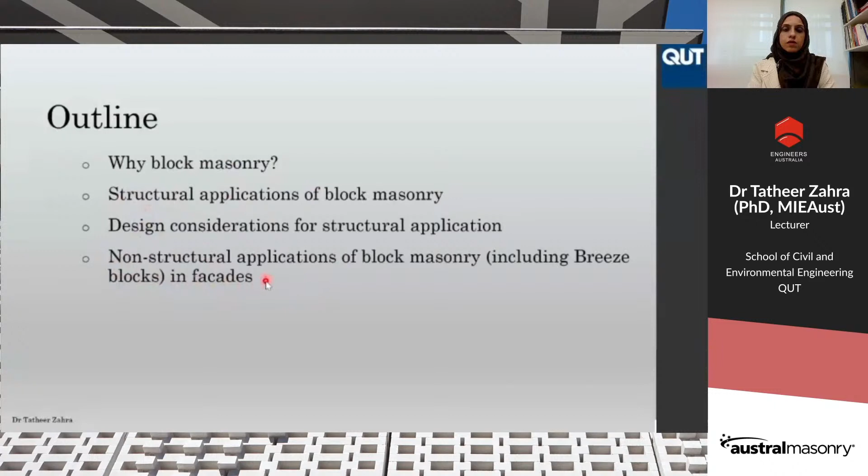So I will talk about the structural applications of block masonry, and further we will discuss the design considerations for structural applications of block masonry. In the third stage, I will take up the non-structural applications of block masonry, which will include the discussion on the usage of breeze blocks in facades specifically.

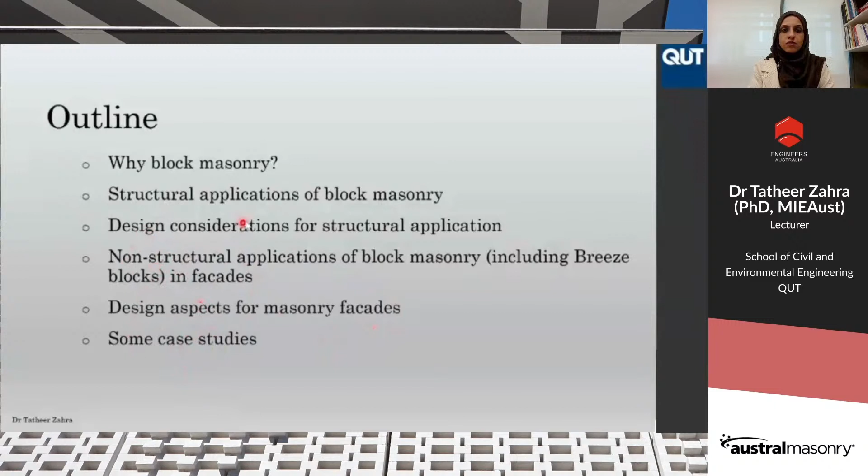So I would like to discuss with you the design aspects for masonry facades and what are the challenges to overcome using these blocks in the masonry facades or the facades of the buildings. Finally, I will conclude my presentation by showing you some real-world examples of buildings which have employed block masonry as structural and non-structural components. So let's start with why block masonry.

Block masonry is comparatively new as compared to brick masonry, which is ancient, and brick masonry has been used for centuries in buildings. So you might have seen many heritage buildings in Australia and around the world which are made of unreinforced brick masonry. Block masonry, in comparison, is quite new. It has been developed with quality control manufacturing of blocks a few decades ago.

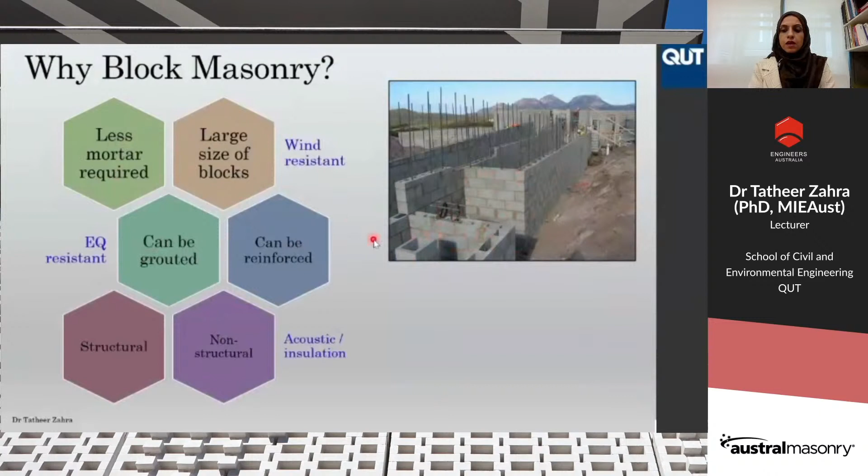And as you can see in this figure, block masonry mainly consists of concrete blocks which are made hollow purposely. And the benefit it can offer is that less mortar is utilized as compared to brick masonry and other forms of masonry. It also offers the use of large size blocks, as you can see in this image. The common block sizes available in the market in Australia are 390 millimeter long, 190 millimeter thick, and the height of these blocks is usually 190 millimeter.

So these, in comparison to bricks, are much bigger blocks. Brick is usually only 230 millimeter long, 76 millimeter high, and 110 millimeter thick. So because of the large size of blocks, you will need fewer blocks to create the same size of wall which one can make in brick masonry.

Secondly, as you can see, these blocks are usually hollow and they have hollow cores in the middle of them. These hollow cores are arranged in different patterns in different kinds of blocks. And the purpose of these hollow cores, firstly, is to reduce the self weight of the blocks, and secondly is to provide reinforcement and grouting. So this aspect enables this kind of concrete block masonry to be earthquake resistant as well as wind resistant.

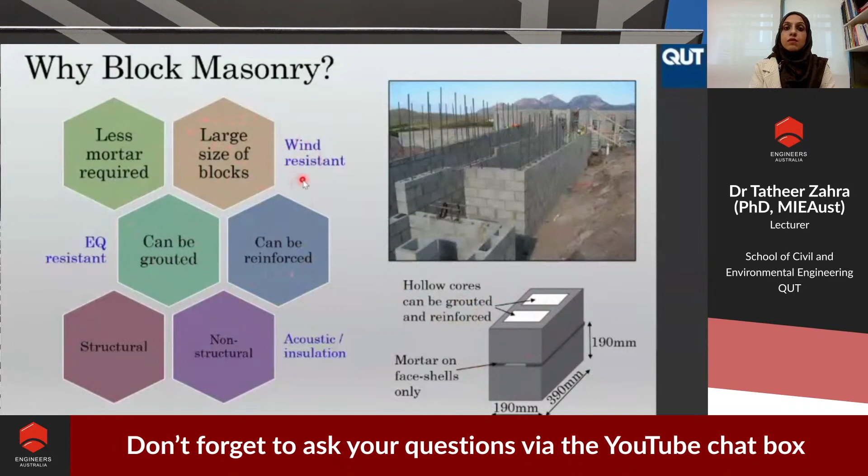So these cores can be reinforced as shown in this image, and the cores can be grouted. Sometimes, if reinforcement is not needed, the grouting can be done alone. And from my recent research, I discovered that grout plays a major role in controlling the strength of the block masonry. I discovered a 50 to 60% increase in the block masonry strength with grout.

Due to these significant properties, block masonry can be used as a structural component in building as well as a non-structural component. And both of these components provide excellent acoustic resistance as well as insulation from heat and sound. So this is a brief introduction of block masonry and what benefits it can offer in comparison to other building materials.

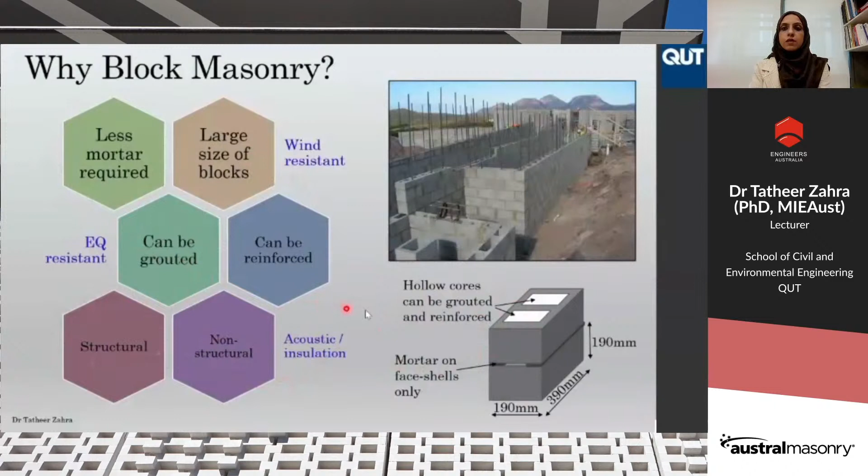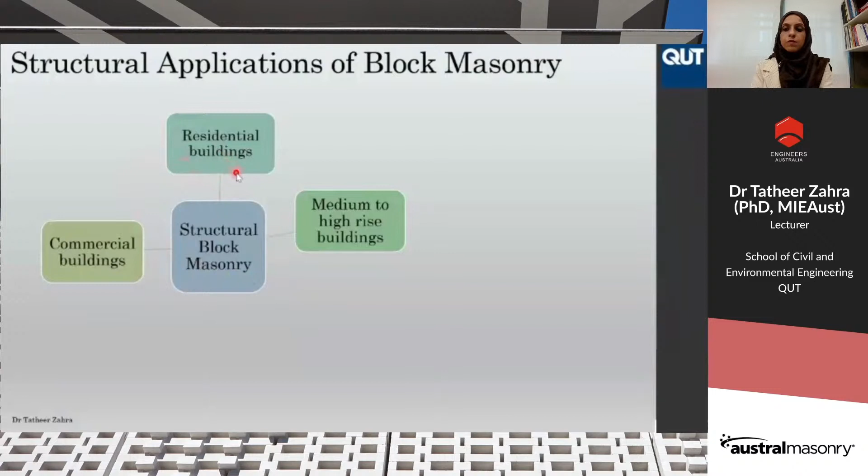Now, the structural applications of block masonry, how it can be used. Like other materials, including concrete, steel, and timber, block masonry can be employed in any kind of building. So it can be used for residential buildings, in housing and apartment buildings, commercial buildings, such as shown here, or medium to high-rise buildings. I'm going to show these real-life building examples later in my presentation.

So the idea of employing block masonry as a structural element is that it is supposed to carry two different loads. First, gravity loads, which are caused by structural elements themselves and other imposed loads. And secondly, lateral loads, which are caused by earthquake, wind pressure, and in some cases by retaining earth. So as a structural element, masonry is used as load-bearing walls, and these walls should be able to withstand the most critical combination of these loads as described by the relevant standards.

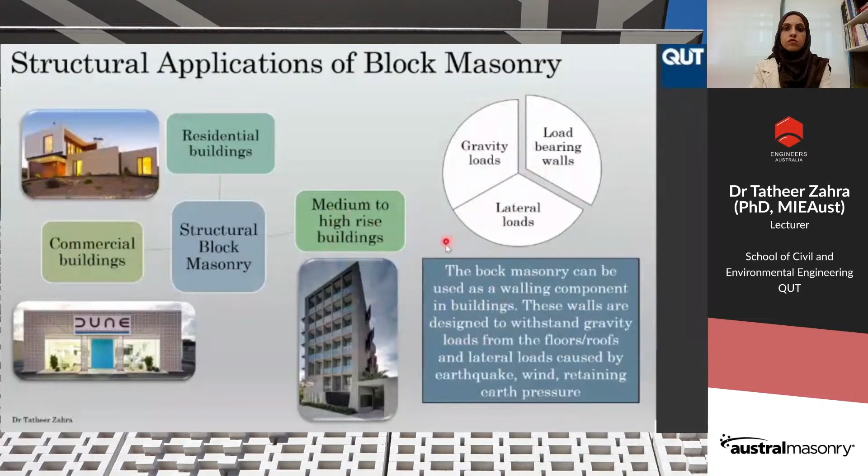So now I'm going to talk about the design aspects so the masonry can withstand these loads. What are the design considerations? Briefly, I will describe the design steps or the design philosophy of masonry buildings. Like any other building, the first step would be to assign gravity loads. This step usually uses the regional codes for any building. So this is at the building level, and the gravity loads are assigned according to the local codes and the usage of the building.

In the second step, usually the fire and durability considerations are taken into account, and then the preliminary sizing is carried out.

So preliminary sizing means basically the thicknesses of the masonry walls are decided based on the fire and durability requirements. I'm going to discuss the fire and durability design later in my presentation. Once the designer gets the preliminary sizes and the assigned gravity loads, a detailed gravity and lateral load analysis is carried out. It can be done through software, and for low-rise buildings it can be done by longhand calculations as well.

Gravity loads are distributed on each wall based on their tributary areas of the floors or the slabs. Similarly, the lateral load analysis is carried out to compute the earthquake loading and wind loading on the masonry building, and finally these loads are combined to find the most critical load combination, and the most critical load is then distributed. So these three steps are carried out at the building level, and then these critical loads are distributed on individual walls. So this is local or detailed analysis of the walls themselves.

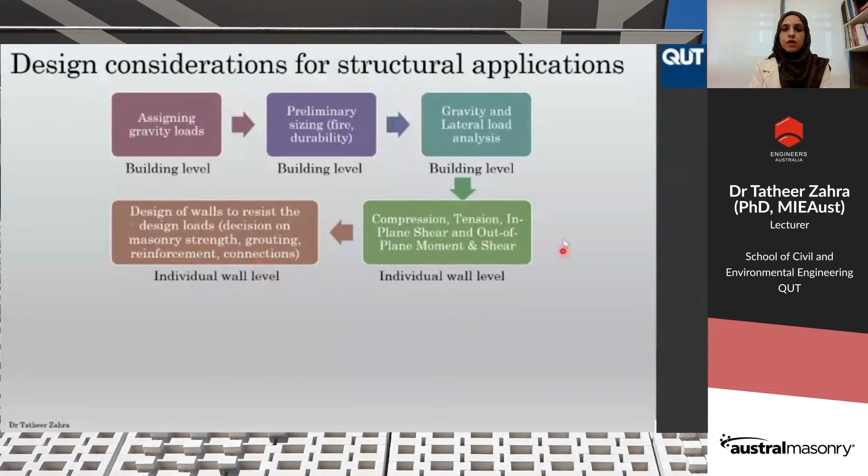I will discuss the mortar grades later, what kind of mortar grades are allowed to be used with block masonry. At this stage, the grout strength is decided if the masonry has to be grouted to increase the strength. Reinforcement diameters and spacings are calculated, and the connections between the non-structural and structural parts of the building are also designed. So this is basically how masonry buildings are to be designed.

Now the Australian standard to be used for designing the walls to withstand these loads and other durability and fire concerns is the Australian Standard for Masonry Structures, AS 3700, and the recent version was released in 2018. This code provides provisions for the design of structural masonry, which can be unreinforced masonry of blocks or bricks, and reinforced masonry, commonly known as URM for unreinforced and RM for reinforced.

The code provides design provisions for durability to resist environmental effects on masonry buildings, fire design for resistance against fire spread and insulation, and serviceability aspects to resist cracking, deflection, and movements in any masonry building. The strength aspects provide resistance against the design loads, whether compression, in-plane shear, or out-of-plane loads. And finally, the stability aspects of any building to resist overturning, uplift, and sliding. So this is a brief of this code, and now I'm going to discuss individually the design guidelines for fire, durability, serviceability, and strength.

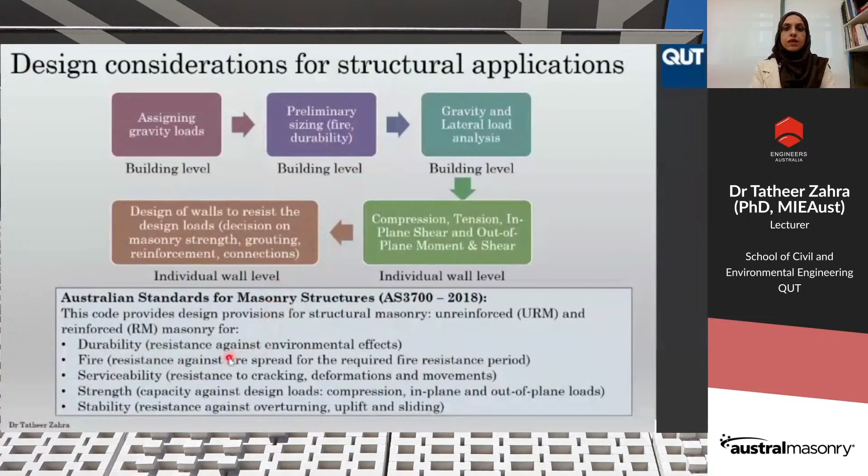Starting with fire design, masonry walls or masonry buildings can be designed using section 6 of AS 3700. This section provides the structural requirements for masonry walls based on the desired fire resistance level. As you might know, the fire resistance level is determined from the National Construction Code, the recent version being 2019, based on the construction type and the building type. Once we know the fire resistance level or fire resistance period, this code provides the provisions for structural adequacy.

For a masonry wall to be structurally adequate during a fire event, it is usually controlled by the slenderness ratio. As one can imagine, in the event of fire, the masonry surfaces can deteriorate and change the thickness of the walls. If the wall thickness changes, the slenderness can increase, because slenderness is nothing but the ratio of height to thickness of the wall. Because of spalling of face shells or any other fire damage, the slenderness is restricted: for reinforced masonry walls it is restricted to 36, while for unreinforced masonry walls it can vary from 15 to 25 depending on FRL.

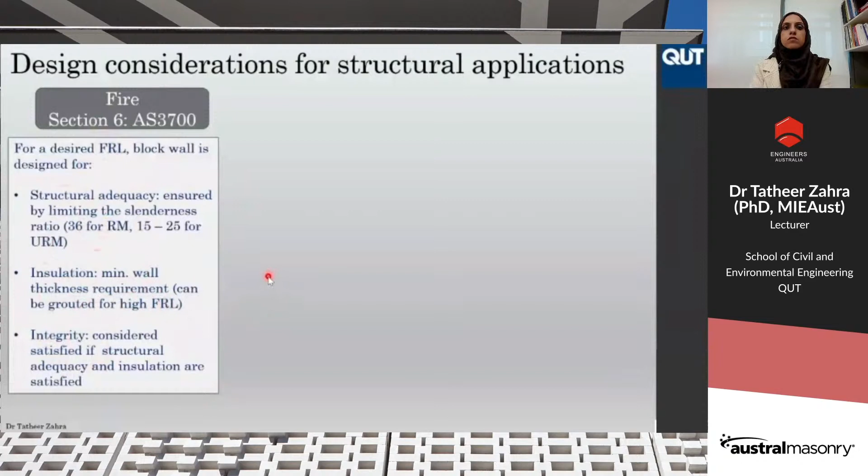So this was about the fire design of the block masonry walls. Now the serviceability. Serviceability can be designed using section 2.5 of AS 3700, and serviceable block masonry will be considered safe against cracking, deflection, and movements. So maximum allowable crack width is given in the code as 1 millimeter, but sometimes it can be 0 because of the aesthetical requirements of any building.

Deflection limits are usually provided for the masonry beams only because they can deflect. Otherwise, for walls, there are no deflection limits prescribed in the code. However, this code provides the deflection limits for the adjoining members or the supporting members so that they don't deflect excessively to avoid damage to the joining masonry.

The third aspect of serviceability: this code says for a masonry building to be serviceable, robustness design should be carried out. And for carrying out the robustness design, a minimum of 0.5 kPa out of plane pressure is considered on the surface of the wall. And then it is made sure by designing it that this pressure can be resisted by the wall throughout the life cycle of the wall, during construction as well as during the design life.

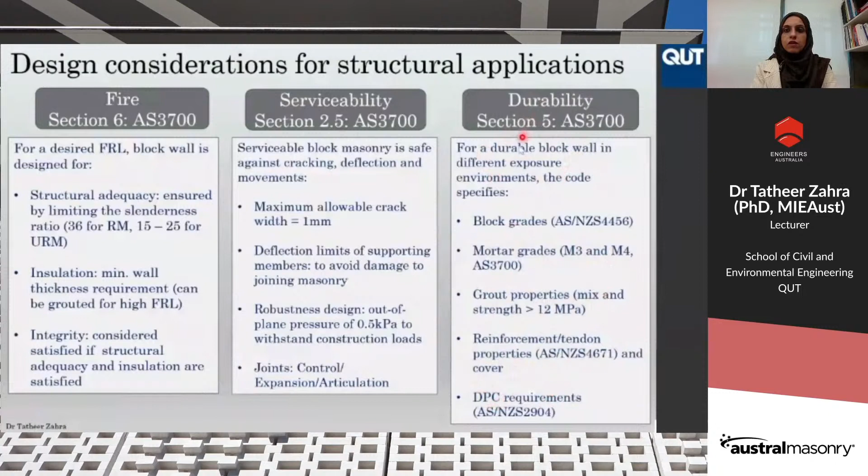Then the reinforcement and tendon properties are also included in the code, and additional details can be taken from AS 4671. Cover to the reinforcement is also specified in AS 3700 to avoid corrosion of the reinforcement. Damp-proof course requirements are also included in section 5, and more detailed requirements for masonry buildings are included in Australian standard 2904. So damp-proof coursing is required for water ingress and water tightness design. It will resist the water accumulation in the masonry walls, and it will resist the deterioration in the surface of the walls, which can be caused by water. So these are the fire, serviceability and durability aspects.

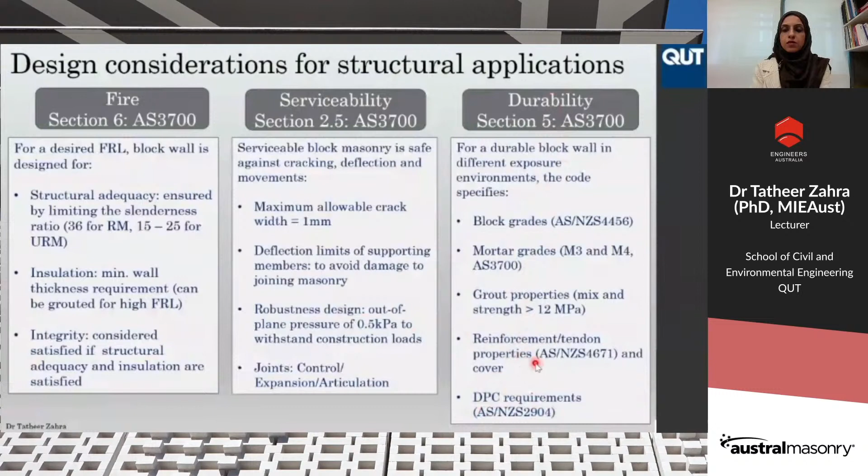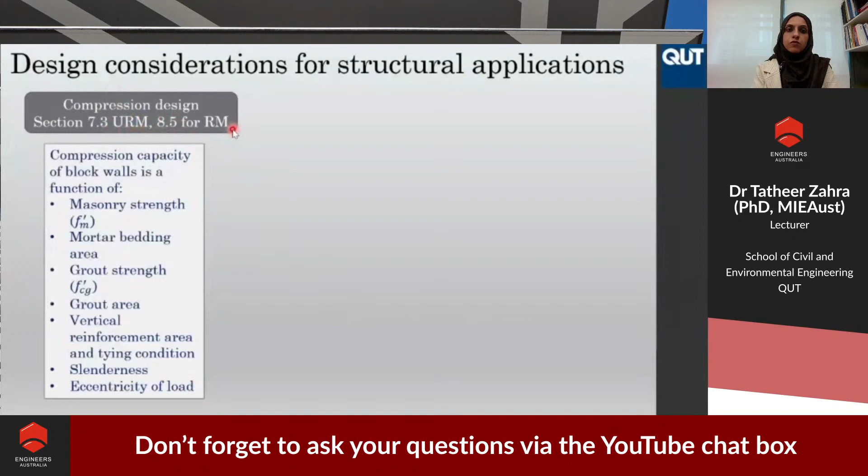Now the strength aspects. For strength design, firstly, I would like to discuss the compression design. Compression design is separate for unreinforced masonry and reinforced masonry. So Section 7 of the code, AS 3700, covers the specifications for unreinforced masonry for compression, shear, and bending. And Section 8 of the code covers the reinforced masonry design. So I cannot discuss the design equations. However, I'm going to discuss the factors on which the masonry compression strength or shear strength will be dependent.

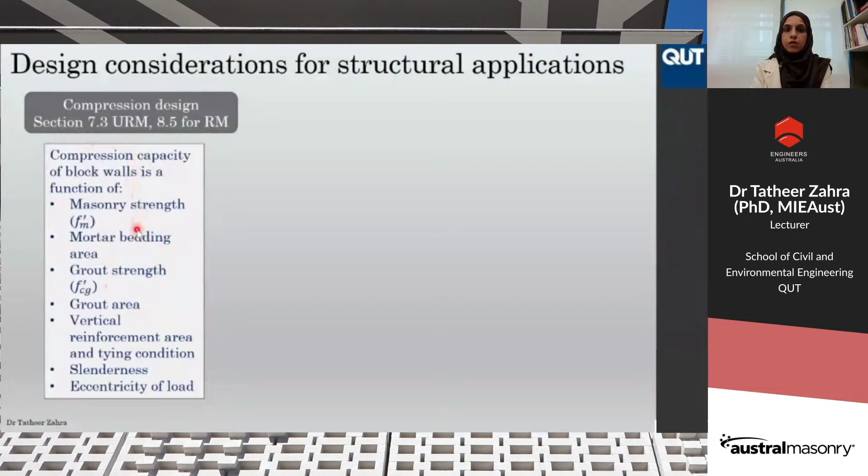Then another important parameter is the vertical bars, vertical reinforcement. If the masonry has to resist earthquake loads, and if the height of the building is more, then vertical bars have to be included to increase the strength of the building. And vertical bars are to be tied in both directions as per the code requirements. There is another requirement that the bars should be centrically placed to provide sufficient bond with the grout.

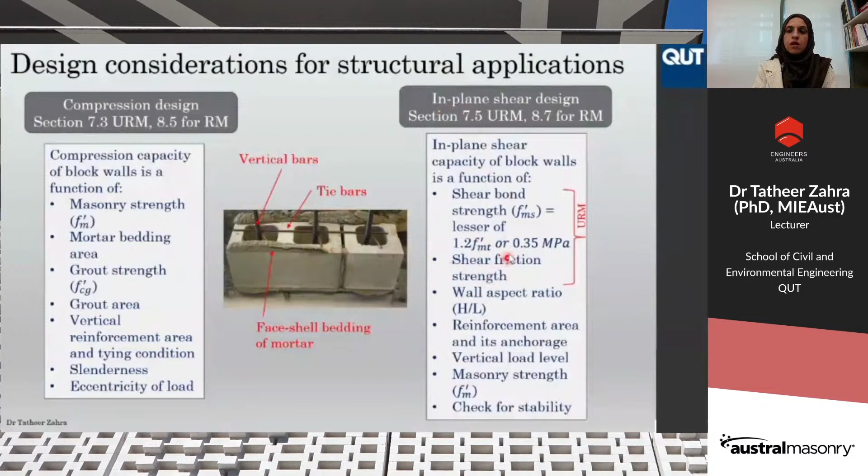Shear friction strength is also important. So the friction between the joints provides resistance against in-plane shear. So because of the low shear strength, you can see that unreinforced masonry can be critical to resist earthquake. However, if we use the vertical reinforcement, then the vertical reinforcement area and its anchorage with the slabs and the footings is important in resisting the in-plane shear. Masonry strength, of course, again plays the major role for in-plane shear.

And this code also checks the stability of the walls against rocking failure. So sometimes the aspect ratio plays a major role in stability failure. So for certain aspect ratios, it is recommended to check stability of the walls against rocking failure. So this was about in-plane shear design of block masonry.

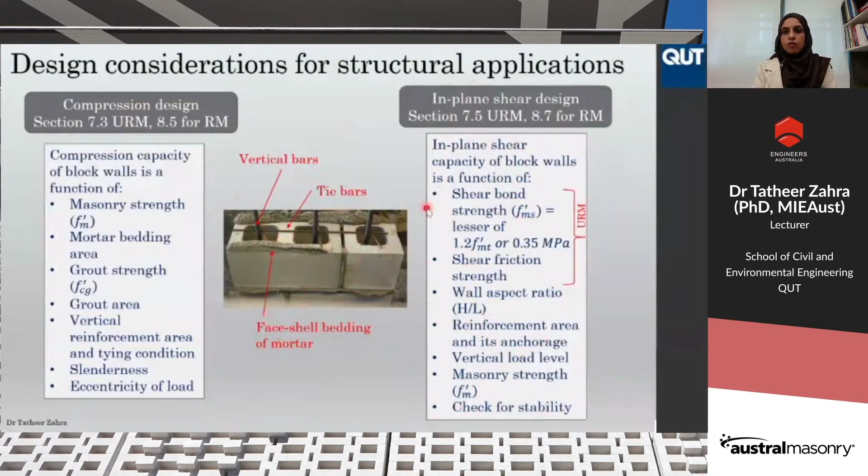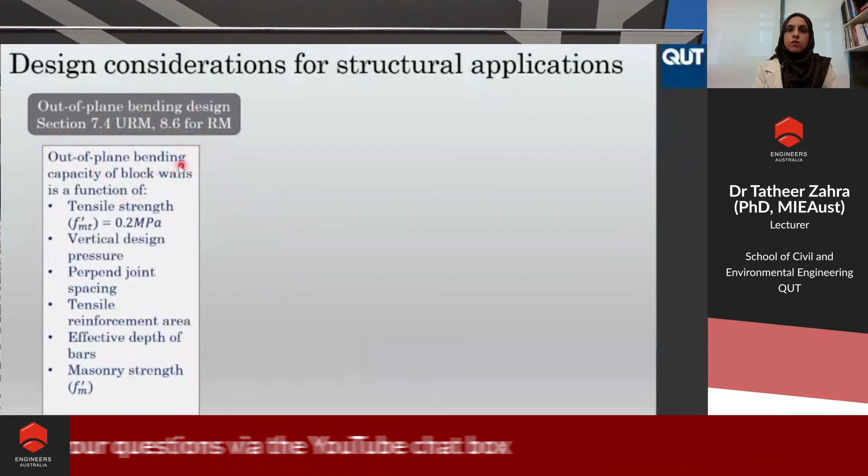Now moving on to out-of-plane bending design. Out-of-plane bending design is covered in section 7.4 for unreinforced masonry and section 8.6 for reinforced masonry. So out-of-plane bending is primarily critical in wind loads in masonry buildings, specifically if the building is in a cyclonic region. So the wind loading will cause critical out-of-plane bending as compared to the earthquake loading.

So for out-of-plane bending, masonry has a very low strength if it is not reinforced, because of the low tensile strength. So according to the standard, the characteristic tensile strength of masonry is only 0.2 megapascal. If it is not tested, then the maximum value is 0.2 megapascal.

So because of this low number, one can imagine if there is no reinforcement in the masonry, then it is vulnerable to earthquakes. In history, we have seen the damage to masonry buildings, specifically brick masonry buildings, because brick masonry is usually solid masonry in which reinforcement is not provided. And in absence of reinforcement, the building will be vulnerable to out-of-plane bending and it can collapse.

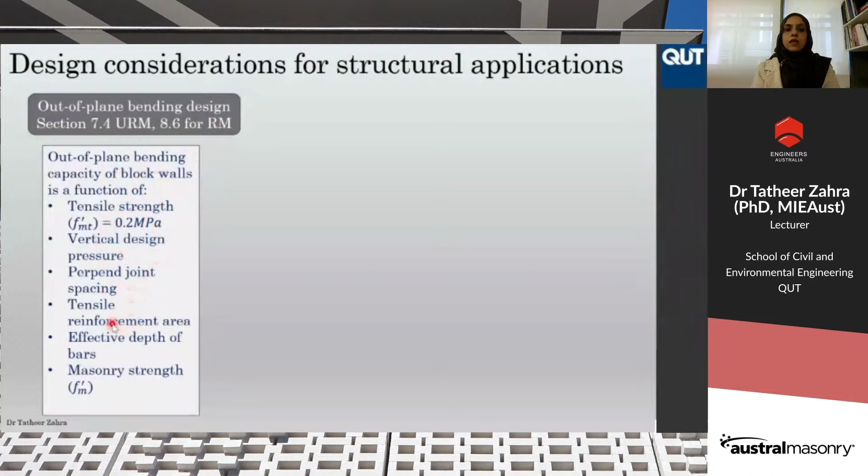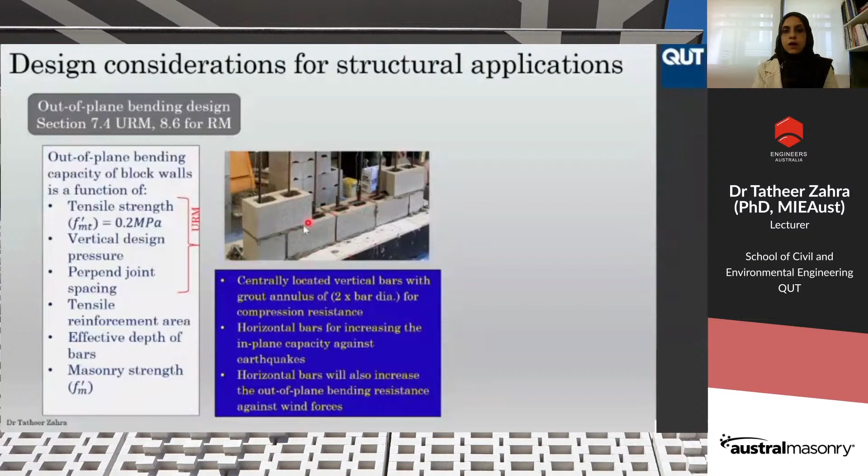So these are some design tips, some considerations which a designer can undertake. The bars should be in the center of the blocks. And the reason behind it is that the vertical bars should have a grout annulus around them, which should not be less than 2 times the diameter of the bar, to provide sufficient compression resistance and the bonding with the bars. Horizontal bars, as shown here, can be provided along with vertical bars. These horizontal bars can take part in taking the in-plane shear as well as out-of-plane bending.

Lastly, the out-of-plane shear design. Unreinforced masonry cannot take out-of-plane shear, so these out-of-plane shear design specifications are provided for reinforced masonry only. Unreinforced masonry will show very brittle failure for out-of-plane shear forces.

For reinforced masonry, the shear strength for out-of-plane shear is considered as 0.35 megapascal. Tension reinforcement is taken into account in the design equation, as well as the horizontal reinforcement. The effective depth and spacing of the bars are the main factors taken into account

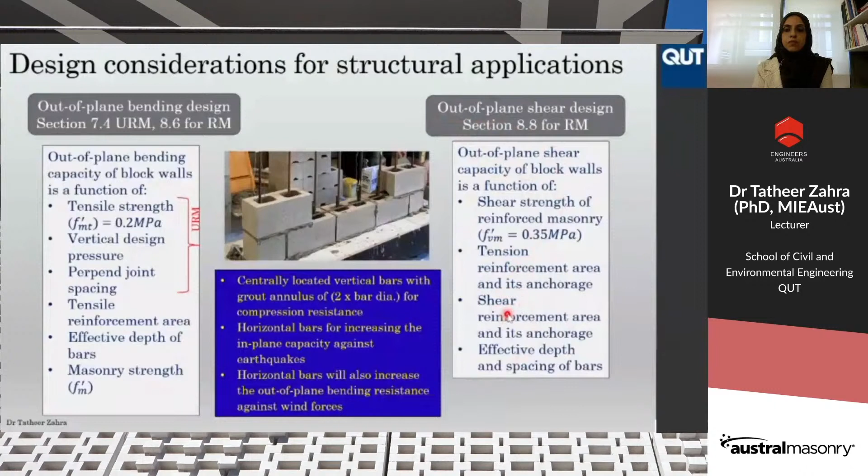for calculating the out-of-plane shear capacity of the reinforced masonry block walls. So these are the main design considerations for masonry, strength and stability wise. Now I will move on to non-structural applications of block masonry.

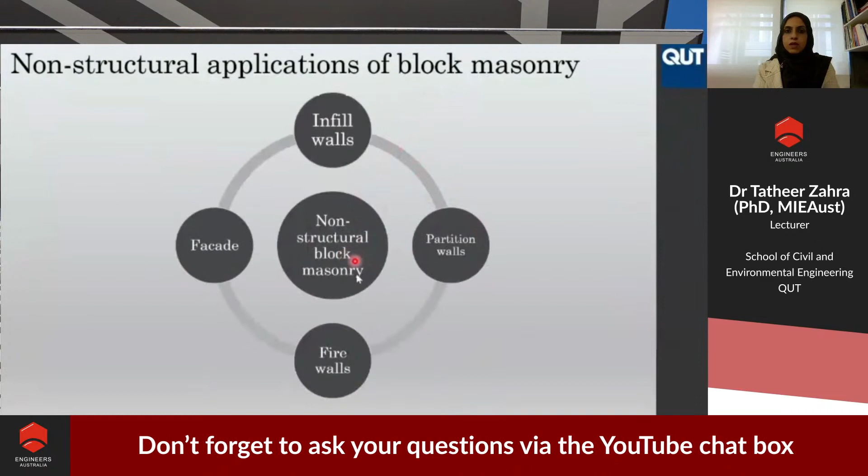In non-structural applications, masonry block walls can be used in certain aspects, such as infill walls. Infill walls are basically the walls in reinforced concrete buildings in which the main structural members are the beam column frames, and in between the beam column frames, masonry is used as infill walls. This is a very common kind of construction.

Partition walls, in which the masonry wall is just used for partitioning of the rooms or space, are a non-structural use of masonry. Then firewalls, which are common in steel or wooden buildings in big buildings to provide fire insulation and resistance to fire, because masonry has good fire resistance as compared to steel and timber.

And finally, facade. Facade application of block masonry is getting attention by designers. In this presentation, I will primarily focus on the facades which have used block masonry and how block masonry can be used in the facade of buildings.

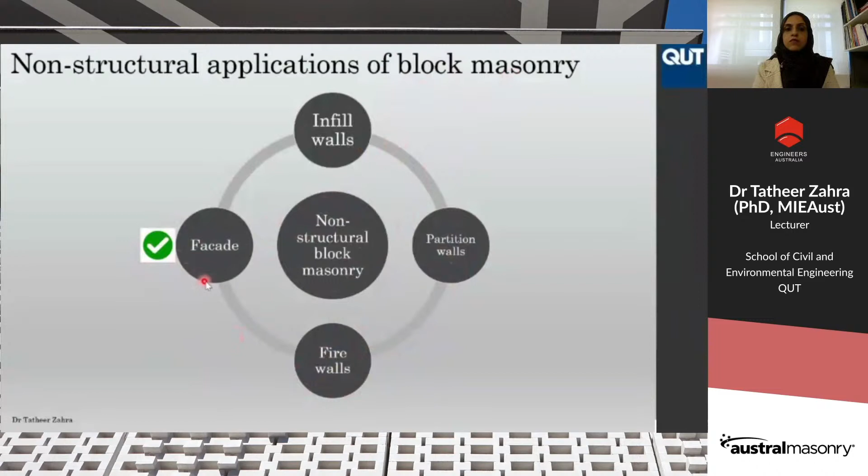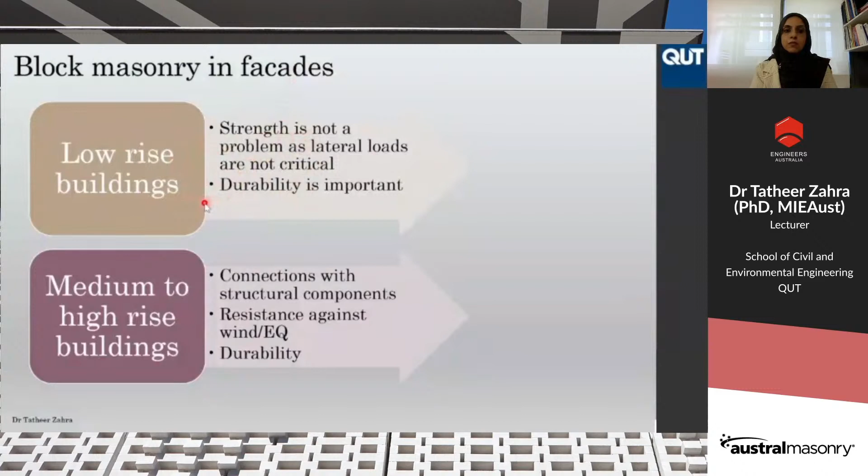Block masonry in facades: for different heights of the building, the design implications will change. For low-rise buildings, such as housing or two-story buildings, strength may not be a problem for facades because the lateral loads will not be very critical. However, durability aspect will be much more important for low-rise buildings.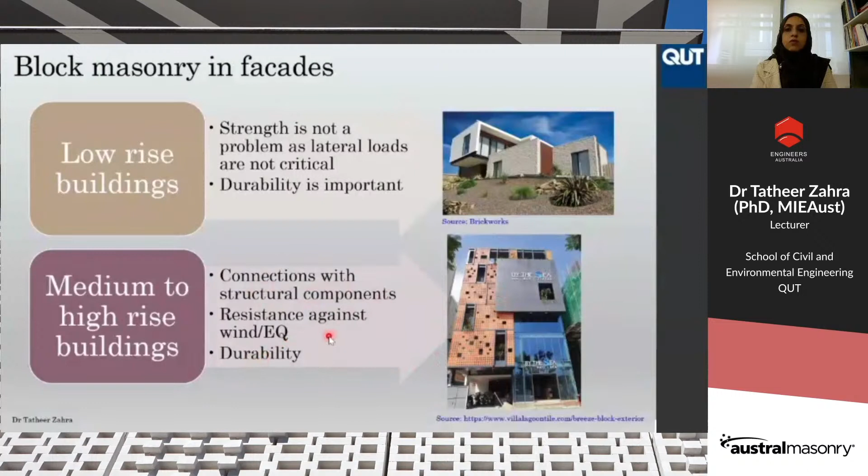On the other hand, for medium to high-rise buildings, facades become more critical in earthquake and wind. The facade panels, such as here, have used breeze blocks, and these breeze block panels are non-structural, but they have to be designed to resist wind and earthquake pressure, out-of-plane earthquake and wind pressure. Secondly, their connections with the backing structure, with the structural components of the building, are important. They are usually supported by steel frames as shown in this image. So connection with the structural components, and then the durability aspect of the facades - I'm going to discuss these aspects now.

Before I start on the design aspects of facade, I would like to share what kind of blocks and products are available in the market which can be used in facades of buildings. As I showed earlier, hollow core blocks with surface texture are widely available in the market, in which the face of the blocks is provided with texture for ornamental and decorative purposes. These are just a few examples, but there are many more products available in the market.

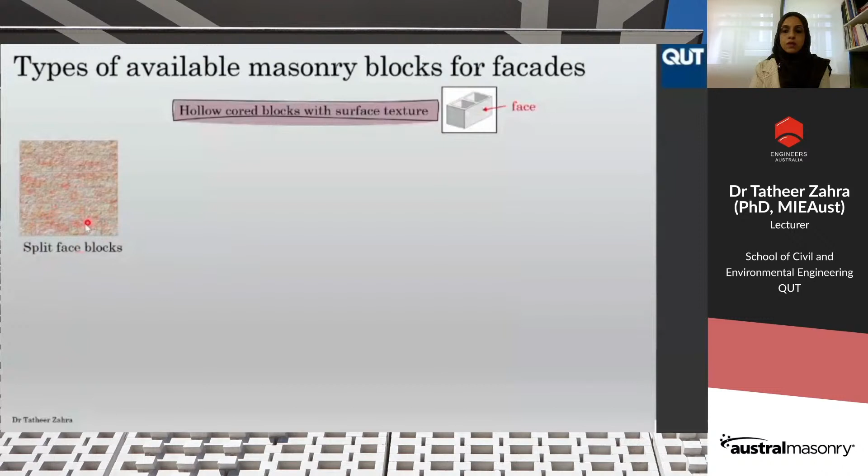Split face blocks have different textures such as limestone and other minerals such as granite, etc., and come in different colors. Honed blocks with lines are very common. Smooth face blocks also come in different colors, without any texture. And then veneer split face blocks, which were recently used in a building facade, which I'm going to show you later in my presentation.

The aspect which is beneficial when using hollow core blocks in facade is that since these blocks can be grouted and reinforced, they can be used as structural walls. At the same time, they can fulfill the purpose of facade because they have beautiful textures. I'm going to show some case studies and real life buildings which have used these kinds of blocks as facade blocks as well as structural walls to bear loads.

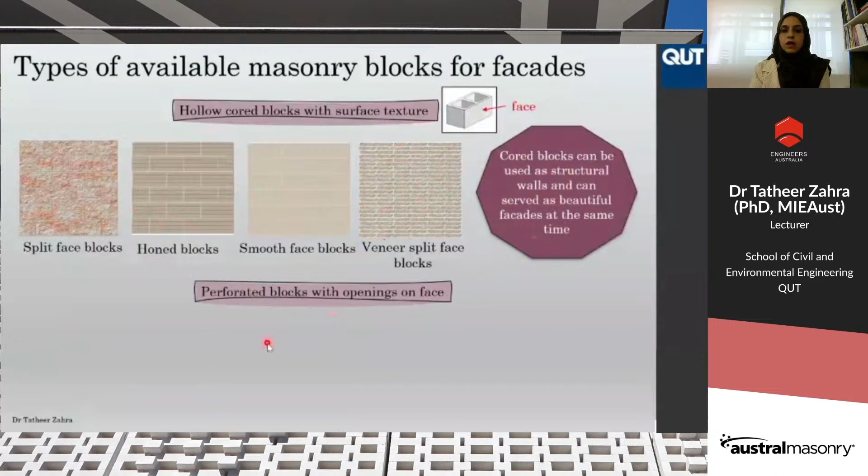Another product which is getting attention is perforated blocks with openings on the face, otherwise known as breeze blocks. Breeze blocks have come into attention after a long period of time. They were very common in the 50s and 60s, but then their popularity died. In the meanwhile, they have picked up the attention of designers again, and I'm going to show some real life buildings which have used breeze blocks beautifully.

Breeze blocks offer two benefits: one is that they have better fire resistance as compared to aluminum and timber, and secondly, they are aesthetically beautiful and provide shading from the sunlight. So I will show some real life examples.

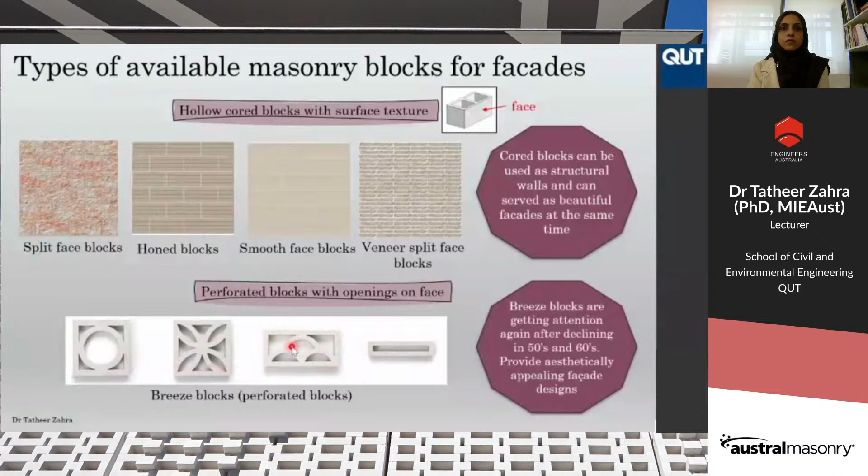Now, the design considerations for block facades. What are the different design principles and the aspects which are important?

First, I would like to discuss the earthquake and wind resistance of masonry block facades. These design considerations are the same for solid, hollow core blocks, as well as for breeze blocks.

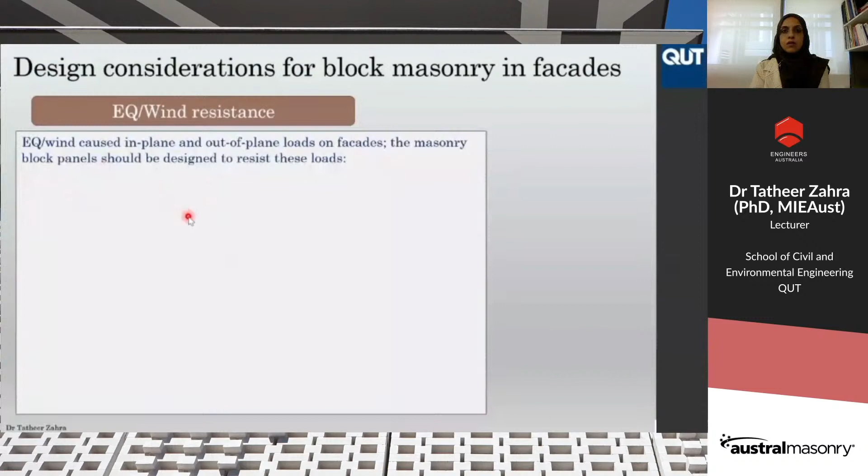Earthquake and wind cause in-plane and out-of-plane loads in facades, and these should be resisted by the block panels. To properly design the facades or block masonry panels against these loads, two properties are important: flexural strength of masonry and shear bond strength.

In cases where the masonry cannot be reinforced, such as in breeze blocks, these strengths can be increased by employing polymer-based mortar.

Secondly, the code specifies that robustness must be checked for all facade panels, whether solid, porous, hit-and-miss, or breeze blocks. As I said earlier, robustness design includes considering a 0.5 kilopascal out-of-plane pressure on the surface of the walls or panels, and they should be able to withstand this pressure.

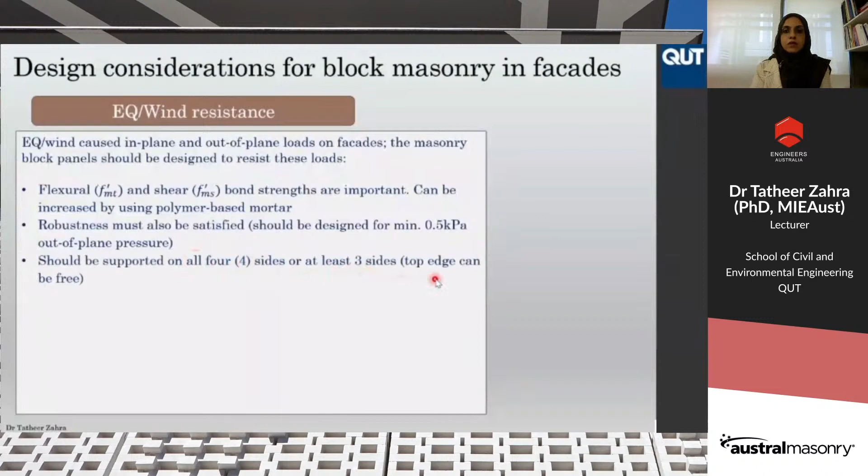Another design consideration is bonded reinforcement between the joints of the panels and the supporting member. If needed, bonding reinforcement can be provided in terms of meshing, angle irons, or flashing angles to support the masonry facade.

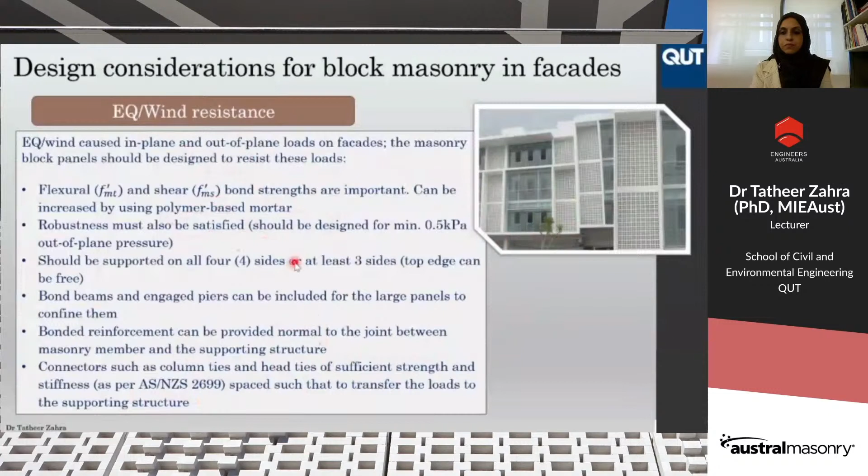So these are all the design considerations which are important to make masonry facades resist out-of-plane pressures, specifically caused by earthquake and wind forces.

Now I would like to discuss the durability aspects of masonry facades. Durability of concrete block masonry panels can be controlled by selecting different kinds of blocks and mortar grades. Usually textured blocks are low maintenance blocks because they provide excellent weathering protection.

However, blocks should be selected and tested as per Australian Standard 4456. This code provides specifications for testing block strength, testing for salt attack, and finding the coefficient of expansion and contraction for heat resistance. Manufacturers, designers, and distributors often have these properties in hand and supply them to designers.

After blocks, the second important aspect for facades is the mortar grade. This is very important, and in the Australian Standard AS 3700, only M3 and M4 mortars are allowed for block masonry, to avoid mortar deterioration in exposed environments.

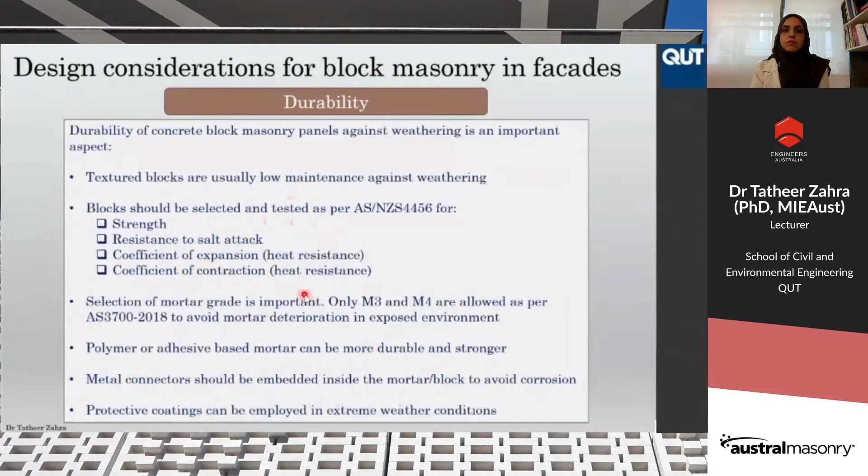Now, this is the last stage of my presentation in which I am going to show some case studies or real life examples of buildings which have employed block masonry in their designs. So I will start with housing, which is the low rise construction.

I have taken these pictures from manufacturers and distributors of masonry in Australia. This picture is from Boral Masonry, and you can see that in this house they have used smooth face concrete blocks as load bearing walls. These blocks fulfill the facade aspect of the building while resisting loads, also serving beautification and ornamental purposes. These two examples show the combination of honed hollow blocks in the main load bearing walls, and the column, as you can see here.

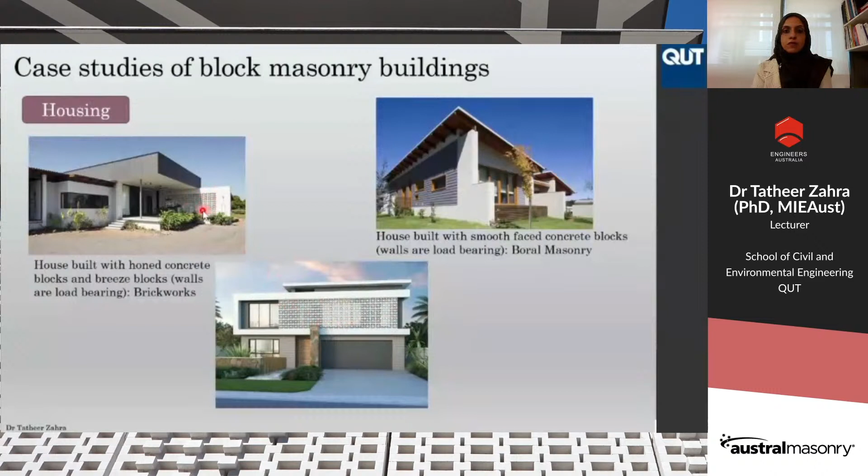Breeze blocks are used in these two houses on the front face for providing privacy, and here on the side face of the building. So the combination of blocks can be employed to serve the purpose. There's another image showing the application of breeze blocks in interior walls, which can employ them for beautification and partition purposes. This type of masonry has huge potential for use as facades as well as inside buildings.

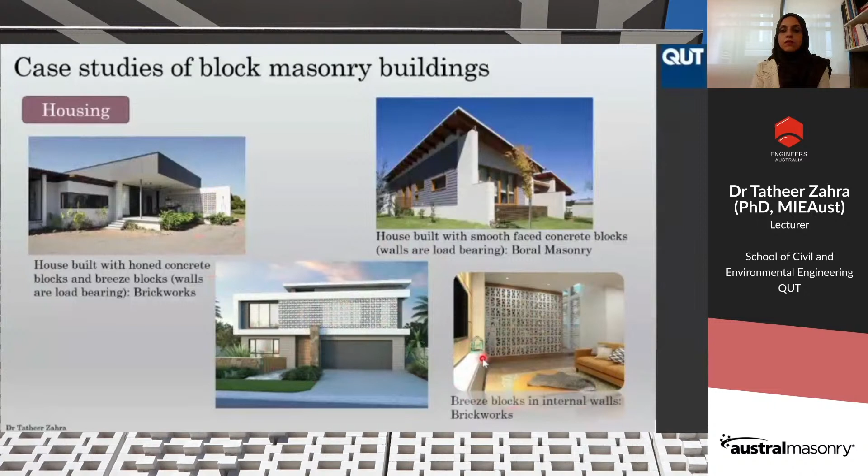Now moving on to low and medium rise buildings, I would like to show this building built in Gold Coast, Queensland, with this picture taken from Brickworks. This building comprises load-bearing masonry walls using split-face blocks with a certain limestone texture. The purpose of these blocks is to resist loads but also provide a beautiful facade for the building.

Similarly, in this commercial building in Queensland, they have used breeze blocks, which are the non-structural aspect of masonry. These breeze blocks are designed in panels, supported on a steel frame with steel columns, steel posts, and behind there is a frame of steel members supporting this facade wall.

I would like to show a building in which the side walls and front walls are made of breeze blocks, and all of these blocks are supported by thin tying members, as you can see on the top and sides of the walls. This is another application of breeze blocks in low-rise buildings.

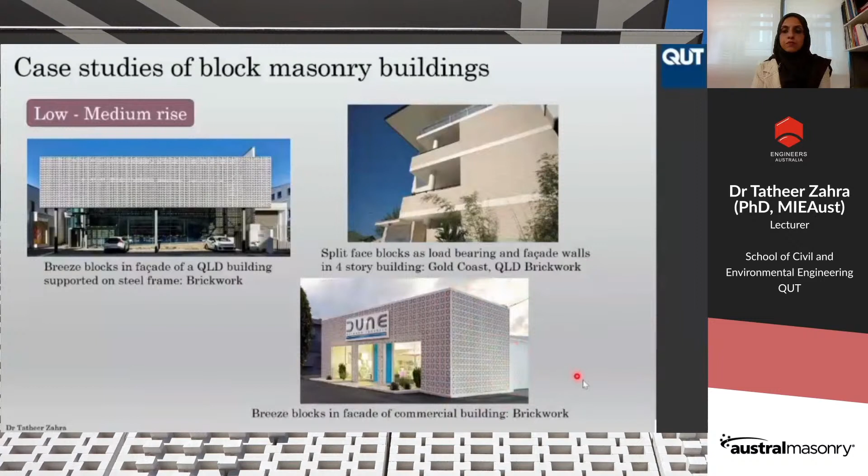Now, I would like to include this building because it has pushed the boundary of designing. This building is not in Australia, it's situated in Arizona. It's designed to employ two shells of block masonry. There is an outer shell of block masonry, which you can see in this picture, which is inclined and shows a beautiful facade in slopes to give it a decorative face.

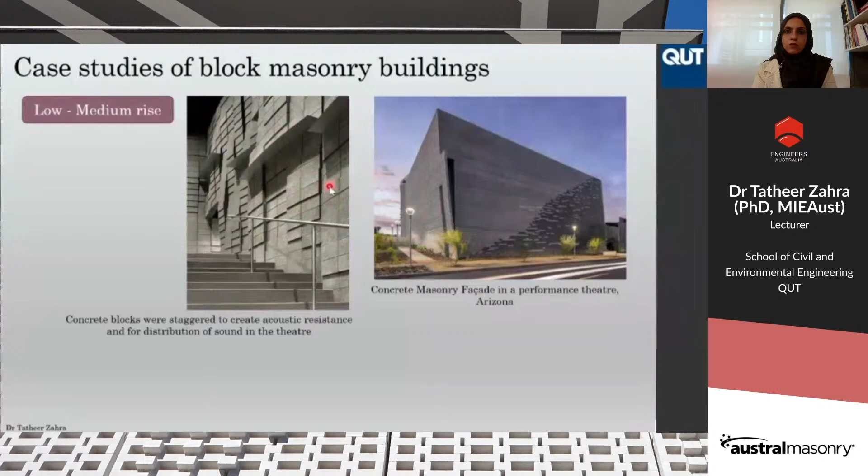Then there is another shell of concrete blocks inside the building, and these blocks are supported by the steel stud framing. So the steel stud framing is the main component for taking loads, while the masonry blocks serve for the facades. The purpose of double shells is that the outer shell makes the masonry facade decorative, while there are double skin masonry walls supported by the metal stud framing.

The inner shell, as you can see, is provided with protrusions and folds designed to provide acoustic resistance and distribute the sound inside the theater. This is a performance theater, and block masonry is used purposely for acoustic resistance and distributing sound to make effects for the performance. This is a boundary pushing application of block masonry in building.

There is another aspect I would like to discuss, which is the slope of the wall. Every course of this block wall is 15 millimeters eccentric from the bottom course. This is really amazing how the designers are using block masonry for achieving a certain purpose.

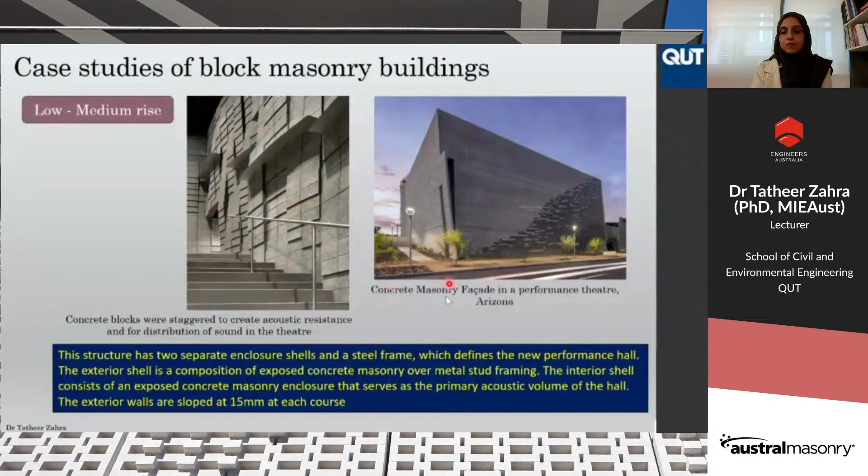This is a high-rise application of using block masonry in a building. This building is in Melbourne, recently refurbished and rehabilitated, on Collins Street, Melbourne. This building has utilized split face blocks on the facade, and these vertical block panels are supported by the steel framing structure, connected with the back structure which takes the load of these blocks. This is a beautiful application of split face blocks in high-rise buildings.

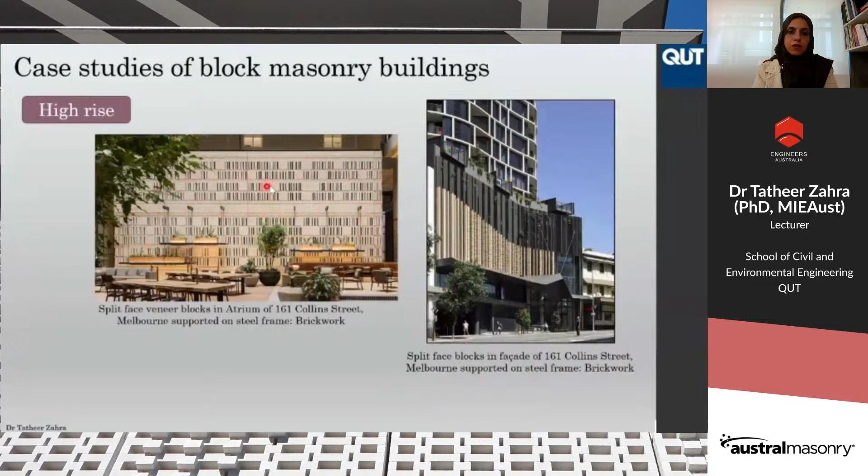And there is another important aspect of the blocks. So inside this building, there is an atrium, which is an eye-catching atrium. As you can see, there is a feature wall, which is made of veneer split face blocks in combination with honed blocks. So honed blocks are used for making the bond beams, while the split face blocks are arranged deliberately with some hit and miss type of bonding, and the purpose of the irregular sized gaps was to make a pattern resembling a barcode.

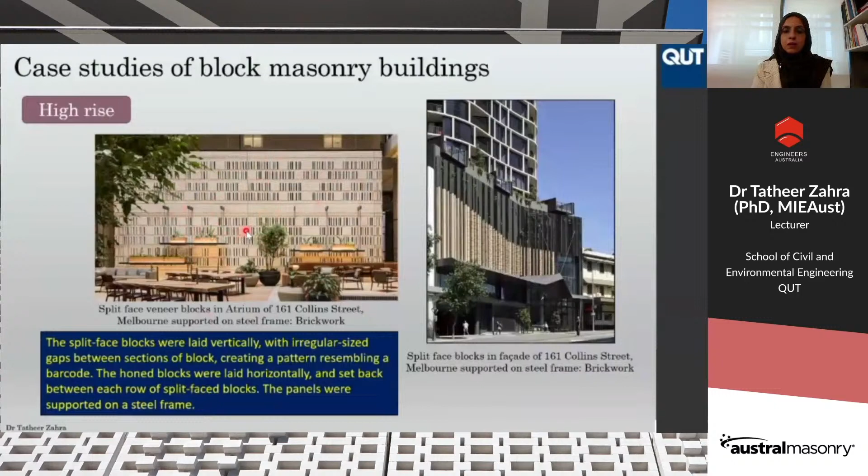So this is a beautiful facade, atrium wall, which was built recently in 2018 in Melbourne, Australia. So it is an amazing use of block masonry in high-rise buildings.

So these are some examples in Australia which can amaze designers with how block masonry can be employed in different ways to provide beautiful ornamental facades and decorative walls within buildings.

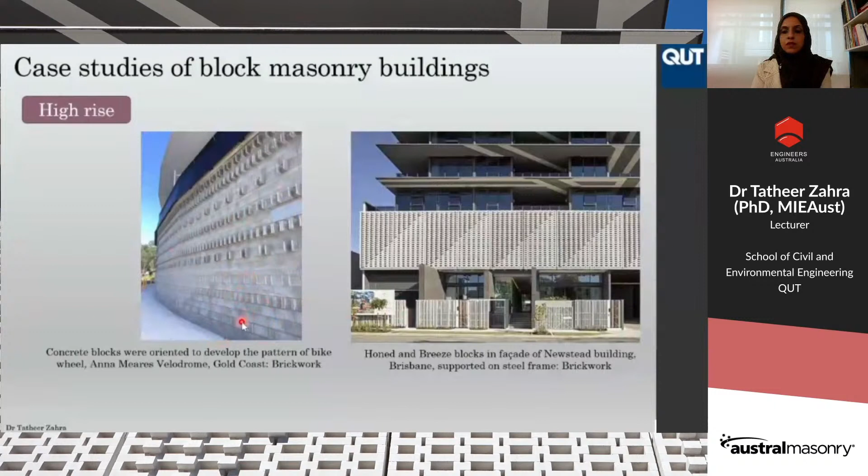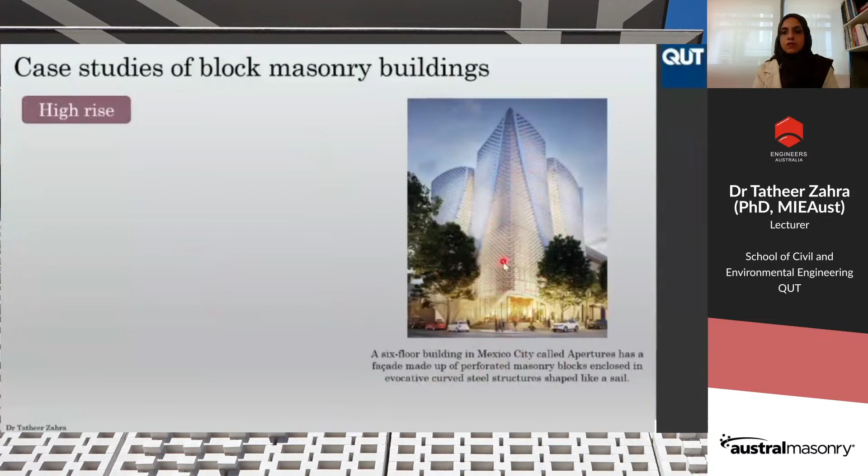This is my last building example, the case study of a high-rise building, or maybe a medium-rise building, I would say. This building is situated in Mexico City. It is called Apertures. It has a beautiful facade made of perforated masonry blocks, enclosed in a curved steel frame to support the masonry facade. And you can see the shape is specifically provided to make a ship sail.

So this is a beautiful application of using breeze blocks in facades of medium-rise to high-rise buildings. You can see the facade is going all the way from bottom to top of the building, being supported on the steel frames on each floor level. These are the supporting frames to tie the facade with the backing structure.

So this is the conclusion of my presentation. I discussed how block masonry can be used in structural and non-structural aspects of any building.